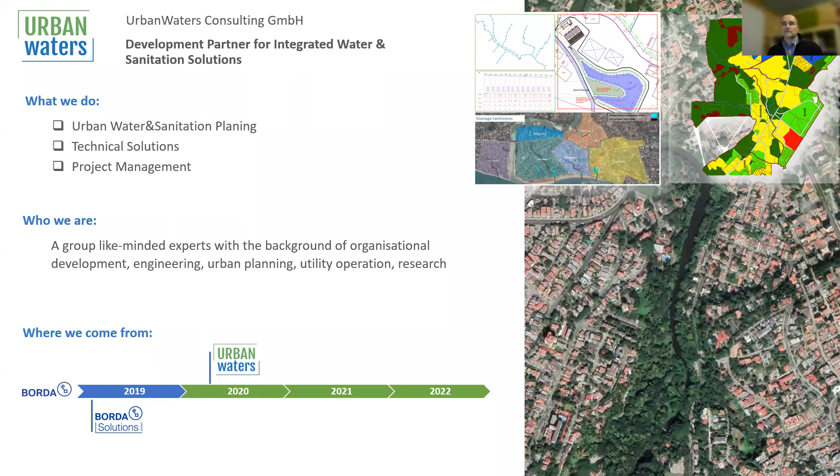This is on the right-hand side, just our core team, a quite international team. We are not yet so much in Latin America, but we now got an assignment with Belize on lagoon systems. Looking forward to this assignment. Otherwise, we are mainly working in Africa and Asia, and our clients are development partners, and our end beneficiaries are usually ministries, utilities, municipalities.

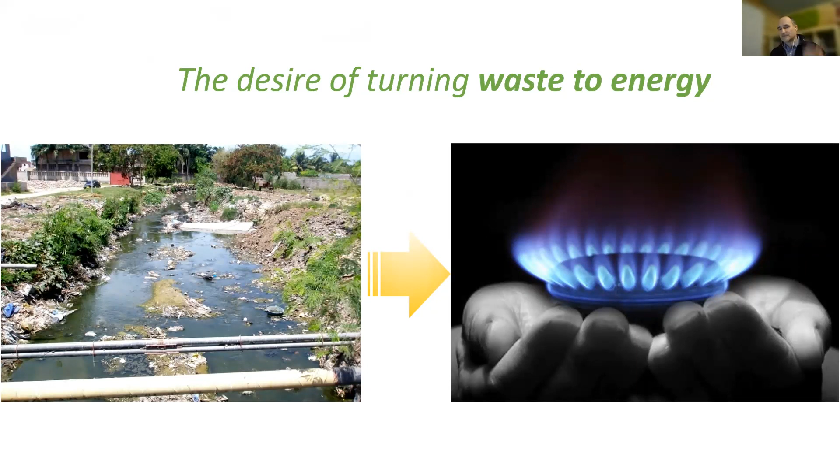So back to the topic. There's always a desire for turning waste to energy. Wherever we introduce wastewater management, we honestly started off with biogas. People saw the need to utilize these resources to turn them into something useful, and this desire is really appreciated. But we need to also acknowledge it is not that easy, mainly from the sustainability point of view. Technically, everything is possible. And this slide is also somehow the conclusion of this whole presentation.

On the top line, a sustainable biogas value chain is actually when the revenue is higher than the cost. Sounds simple. In reality, it's often not the case. Meaning the expectation for revenue from turning waste to energy and covering the cost is much higher than what reality can actually feed. That's why it's quite important that we understand the value chain a little bit.

On the left-hand side, sorry, we have our feedstock, our resources, which could generally be for biogas production food waste, municipal food waste, any type of food waste. Then wastewater, which for those who deal with water and wastewater is the most interesting part. And agro waste, which is a very common feedstock, from any other type of agriculture waste. Then we have a reactor where we're producing the biogas with the help of microorganisms.

Then depending on the utilization concept, which is on the other side, we want to use the energy for cooking, for heating, electricity production, or even for mobility purposes. We need to see in what type and what quality we're getting the biogas, and that determines in the end how we need to convert the biogas and perhaps also clean it. As you could imagine, if we want high quality gas, then we have a lot of input we have to give to convert, to clean, to produce, in order to make it feasible for electricity production and so on. But the easiest way for biogas utilization is turning it into heat, just burning it, because you can take the gas straight away from the digester.

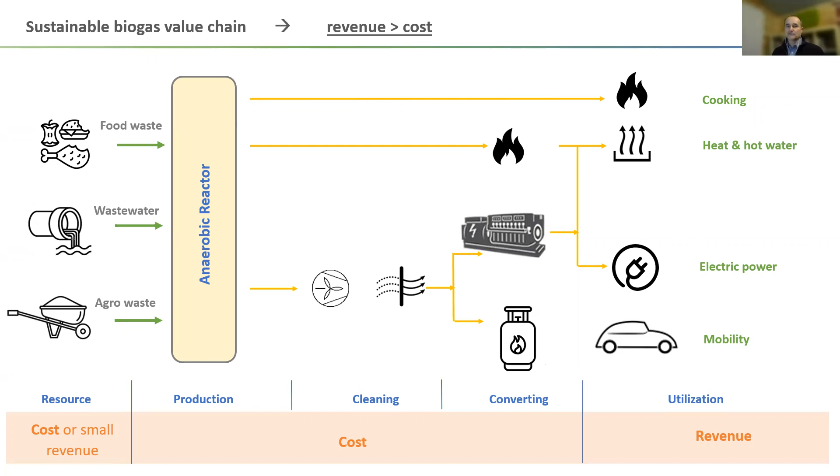And if there is an industry that needs just heat, sell the heat. Don't go for the most expensive, like electricity or even converting into gas. Gas bottling is one way of doing it, but it needs high quantities and sophisticated technology.

If we're looking at the wastewater part, then we're actually dealing with a feedstock which has the lowest energy density we could imagine for biogas. If we take 1 cubic meter of raw municipal wastewater, depending on the conditions and on the reactor, we might get 150 to 250 liters of gas out of 1 cubic meter. If we take sewage sludge, either from the primary settler or from the activated sludge basin, and dewater it, then you get 6 to 7 cubic meters of biogas per cubic meter of sludge, a higher concentration of energy.

And if you look at organic waste, which is more a solid waste, then you get 50 to 70 cubic meters per ton out of it. So we need to understand that actually the energy density in wastewater is relatively low, but still it's possible.

And of course, we need to look at the most sustainable way we can turn and utilize the gas. And we need also to consider that wastewater is a source of greenhouse gas emissions. It's for methane, it's for CO2, and it's also for laughing gas. And if we are also able to collect the gas which can be generated from wastewater, we could potentially, through other financial instruments, generate additional income through greenhouse sales.

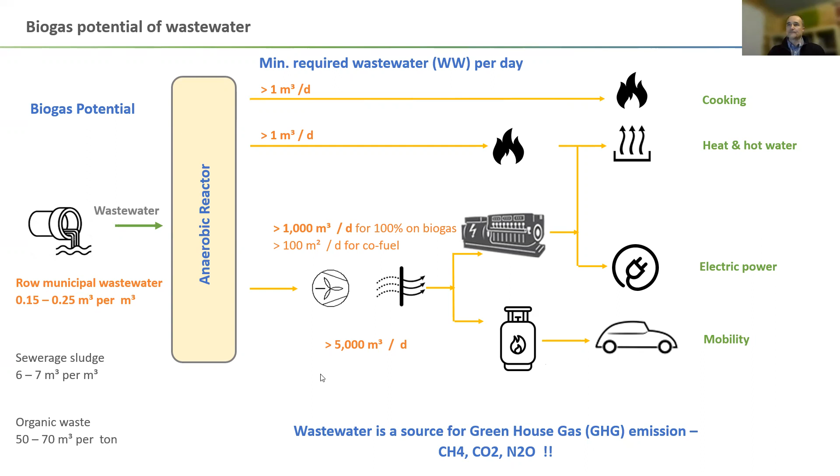Okay, got it. So if we're not looking at a municipality but an on-site system, meaning households that have a little bit of land, we cannot connect them to our sewer network, and they're looking for their own septic solution, we could convert septic tanks into a small biogas plant. And this concept has been done many thousands of times in Africa, China and Asia.

These really small systems, where the wastewater and sometimes kitchen waste goes into the biogas plant, gets partially treated in the biogas digester, which is underground, then a small constructed wetland. The overflow then goes into some irrigation system, and the biogas can go back for cooking purposes.

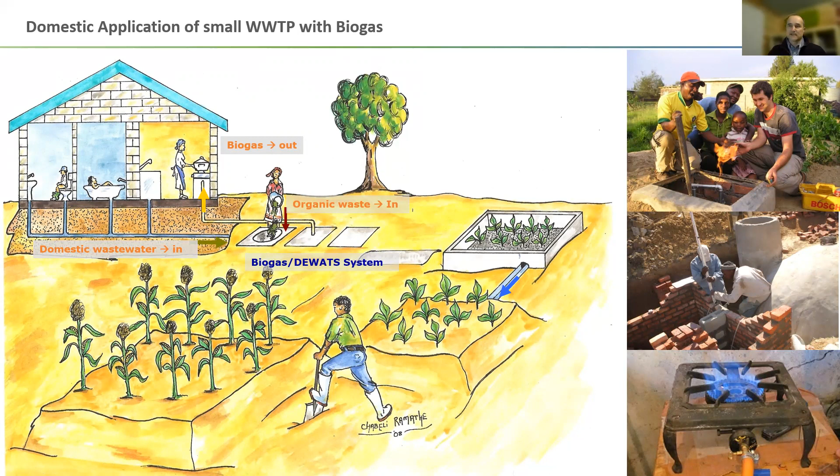I have been working with this system in South Africa. It has become quite common, and artisans and small companies have specialized in manufacturing ready-made small septic tanks with a biogas function, and sometimes with post-treatment. So a really small package plant with biogas. And the application of those small systems is usually smaller, 10 cubic meters a day, for households and institutions.

They're generating 200 to 3,000 liters of biogas per day, mainly for cooking and heating water. The effluent is irrigated or infiltrated, or sometimes also connected to the public sewer, acting as a pre-treatment system. The efficiency, of course, is quite limited, 50 to 70%. But if you connect the effluent to a wastewater sewer system, it could also be an advantage if you have a solid-free system, which I'm discussing a bit later.

Cost-wise, it depends how it's been built, whether brick-built or prefabricated, how complex the system is, how big it is. The smallest you can get from $600, and the biggest around $2,500, brick-built or prefabricated mass production, and very common, as I said, in Asia, India, China, and Eastern and Southern Africa.

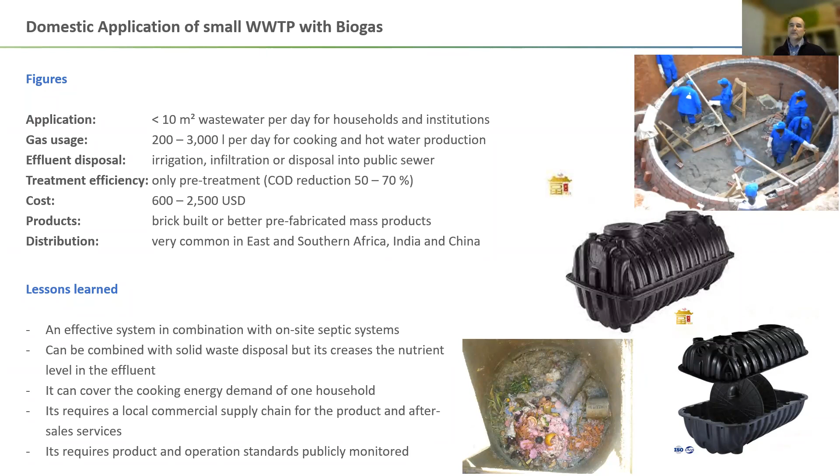Another concept, a little bit on the municipality level but still small scale, is combining simplified sewers with biogas. There's a big discussion: what's a simplified sewer? One concept is actually, let's drop the solids at the decentralized level in the sewer network and have most of the sewer network free of particles and solid waste.

So we design sewer networks so that we have enough hydraulic energy to bring the solids in the sewer system from A to B. And this requires a diameter, a certain slope, and a very smooth implementation. But in the end, it's also a lot of headache. If we can drop the solid waste at decentralized level, having a pre-treatment, we're reducing the COD for the main treatment, reducing TS, and having a much more simplified sewer network. Even if you don't lay it so straight, it doesn't matter, because it cannot settle anymore. You settle your solids in a controlled way in the system.

And if you like, as we have done in certain communities, you can also extract the biogas, and some caretaker can utilize it, or you give it to a restaurant. So this is a concept we have implemented in Zambia together with 3 utilities. An advantage of the system is that we're protecting pumps, because all the solids, even the trash, were caught near the source and not at the pump station. We had no wastewater solids, hence the pipes could be laid with less gradient, not as deep as usually required. That means less construction and excavation cost. We had much less cleaning and unclogging.

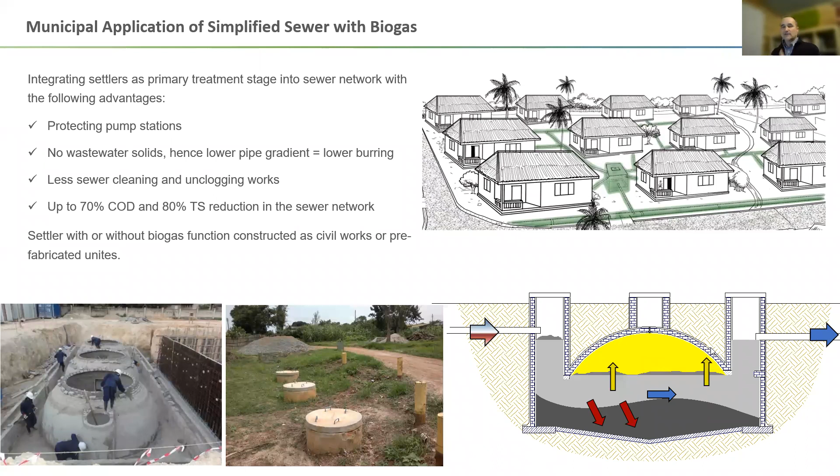And as you can see here, the mixture of water and solids comes in the inlet, drops down, and then the outlet is mainly solid free. What will happen if they don't desludge the digester? Then, of course, sludge will also wash out, but the sludge is no longer the big particles and the paper and whatever. It's only very fine particles, which can easily flow with the water. So in principle, we got here our raw wastewater.

From the maintenance point of view, we need to regularly have a look at the inlet, usually monthly removal of scum. We usually connect 20 to 50 households to one settler. The size is 20 to 50 cubic meters. Usually we put it next to the street; finding the space in the community is sometimes a bit challenging. Then also the cooking: yes, having biogas is fine, but we say only 10 households can serve the biogas for one household. And then there's also the question of which household gets the biogas. So some community work, involvement, and participation is really required.

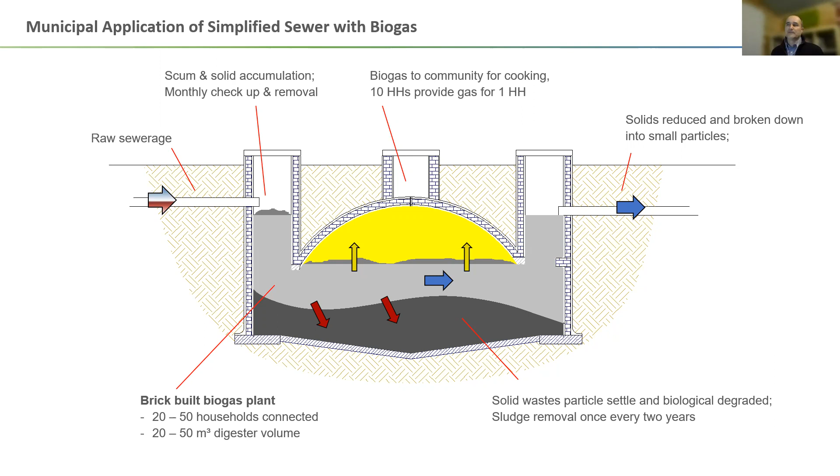And we usually say the utility should come with a vacuum truck once every 2 years to empty the digester and take out the sludge. So these are some of the principles. Here is a little bit of the implementation concept. This is a community in the center of Zambia. It's a low-income community.

Here we connected 120 houses, and this is the collection pipe shown here, which is nearly 4 kilometers in the community. We installed 4 biogas plants, one here, one here, one here, and then at the final. But this was actually not needed anymore. But mainly the 3, they do most of the job.

Then we got the wastewater treatment as well with a constructed wetland. And in the end, we put in the natural wetland a banana plantation before it goes into the final water body.

So the biogas settlers are producing 0.5 to 1 cubic meter biogas every day. And through this constant water flow, we're reaching an amazing methane concentration of 75 to 80%. And we have reduced already in the sewer system 50 to 65% of the COD loading rate.

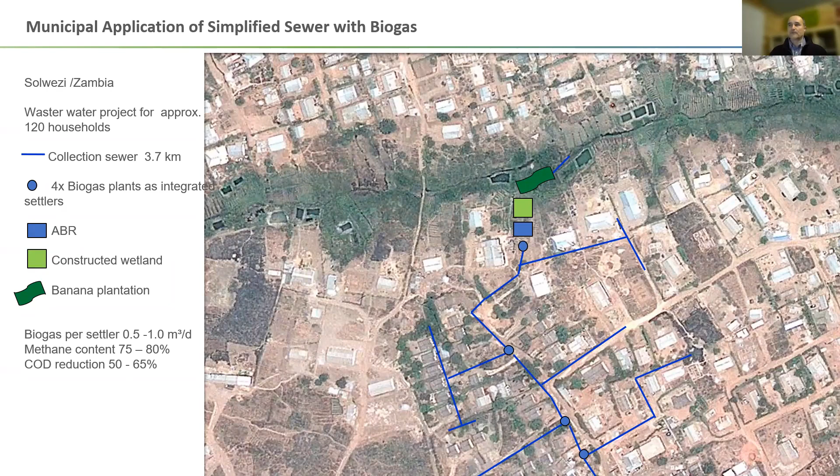Okay, so another concept, and then we're almost through and I'm open for discussion. It's a little bit more on the treatment side. Lagoons: there is a big discussion about covering wastewater lagoons and collecting the biogas, which absolutely makes sense, especially if you focus on the first anaerobic lagoon, the pond. Usually only the first one; the others are facultative or aerobic. They don't need it, but the first lagoon, which is usually anaerobic, absolutely makes sense to cover.

You don't have odor, you're not getting mosquitoes, you have no greenhouse gas emission, and you have the ability to capture the gas. So there are mainly 2 systems available. One you see on the top, this is really a big one. You have this membrane with integrated gas storage. As you can see, underneath is the gas storage. It's usually a double membrane. There are also a few with a single membrane, but usually there's a double membrane.

That means there's another membrane underneath, which is going up and down with the gas pressure or quantity. And the outside membrane just gives the shape. But to maintain the shape, you usually need an air blower or gas blower, which constantly blows air in it. Because if you don't have the shape and you get heavy rain or wind, it will create a lot of tension on the membrane. It might crack and break. So this is a bit of a disadvantage.

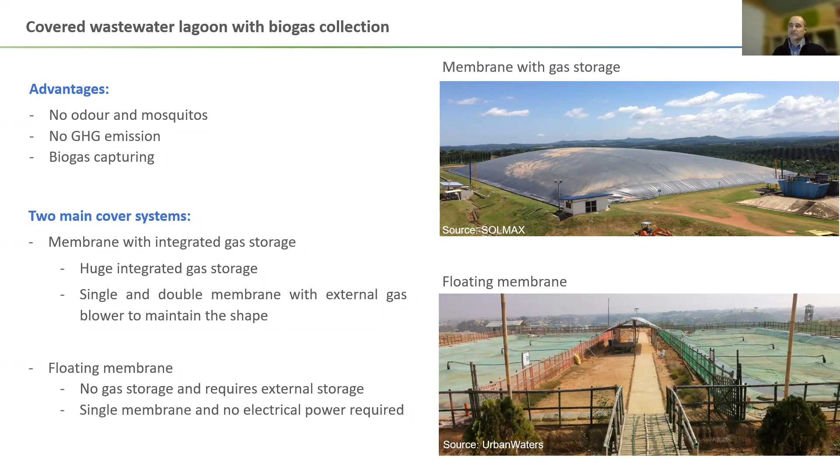And as I said in the beginning, we usually work in areas where the sector is not yet developed, where constant electricity supply is often a challenge. So we came up with a Dutch company on the floating membrane concept, as you can see on the bottom. This is a project in Bangladesh. These are wastewater or sludge lagoons we covered with a floating membrane. The floating membrane really floats on the surface, it's a single membrane, and it doesn't need electrical power to keep anything in shape. So this is the main advantage.

And here a little bit more in detail. The disadvantage is you don't have the gas storage; pros and cons. So you actually need an external gas storage, and the gas pressure is very low. On the other hand, if there is any damage on your membrane, you're not losing the entire gas. As you can see, we can collect the gas at as many points as we wish in a very simple way with simple domes integrated in the membrane. And if we get a leakage somewhere here, all the others can still collect the gas underneath the membrane. And usually the pressure, which is below 5 millimeter water column, is enough to run a torch.

But if you want any other system, even for cooking, for lighting, or here we're generating around 80 to 100 cubic meters of gas a day, we need to pump it into external gas storage, which can have different designs, with the help of a small blower. So this is needed, but we don't rely on electric energy to keep any shape, and if we have damage, it will not affect the entire system.